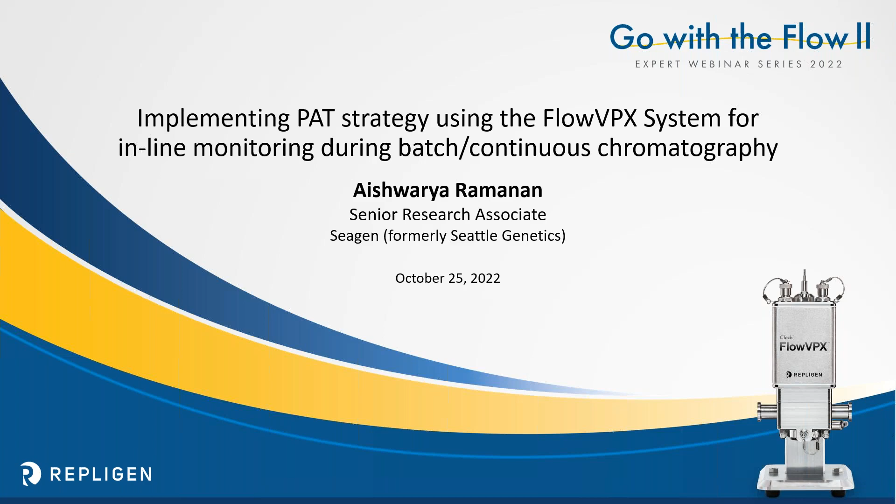The title of today's presentation is Implementing PAT Strategy Using the Flow VPX System for Inline Monitoring During Batch Continuous Chromatography. Aishwarya, thank you for joining us, and please take it away.

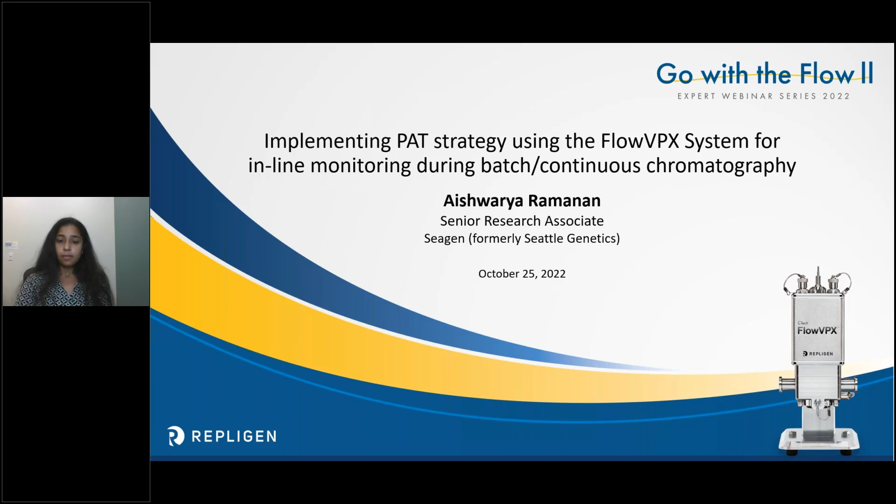So I will be starting by giving a quick introduction on the typical purification process flow and how and where PAT technology can come into play, followed by how VPX in particular helps with the process intensification efforts, be it in batch or continuous processing. And I'll be emphasizing more on real-time titer measurements, real-time binding capacity, especially with a dynamic load in between the process intermediates, and also talking a bit about the elution or eluate collection criteria determination, followed by an overview on integrating the Flow VPX with the Repligen KrosFlo KR2i system for automated TFF runs, and closing off with a summary and a takeaway from the overall presentation.

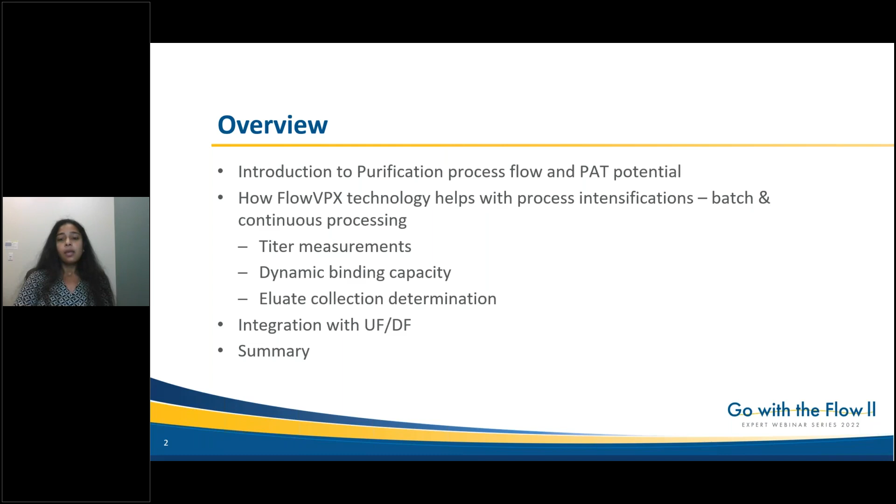So for starters, every industry already has a very well-established process with their batch chromatography. Why this craze to move towards continuous processing? And addressing the first point of smaller plant spaces, I think this is something we see even outside of the industry. As the demand is increasing, we are seeing smaller and smaller spaces available, and as such, that requires smaller setups. And with smaller setups, we are reducing waste, environmental impact, costs, and most importantly, the production time and the developmental timelines, because the scale-up requirement is reduced as you move on to a smaller setup.

And this helps meet the improved or increasing market demands. And finally, this is going to enable automation, which could help reduce human errors and ideally improve the regulatory compliance by automating the entire process.

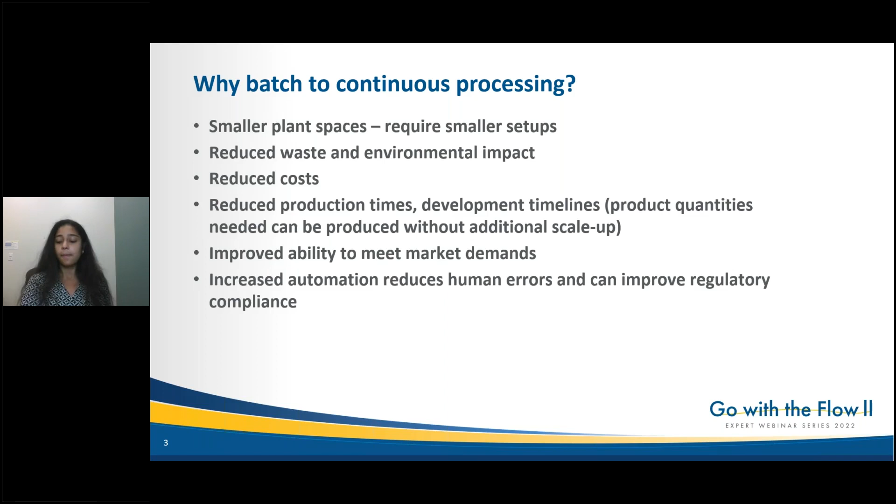So just to give you an idea of what a typical downstream process flow would look like: we have a production reactor from upstream, and from the production reactor the harvest is taken and processed over a depth filtration or clarification step. The clarified harvest then, typically for mAbs, goes through affinity chromatography, and typically it's a protein A resin.

After the protein A purification is done, the eluate from the protein A pool is processed through a low pH viral inactivation step, and it goes through an additional depth filtration followed by a polishing step. In some processes, it may be a 3-column step, and it may require a second polishing step.

After the polishing steps, it goes through nanofiltration and a TFF, or tangential flow filtration, step, where you're concentrating your protein or antibody to the desired concentration and diafiltering into the desired matrix. And finally, bulk filtration or sterile filtration and your final bulk intermediate.

The technologies we currently have that enable measurements, be it titer, in-process intermediates, protein concentration, or final bulk concentration, are the Cedex Bio HT analyzer. This is mostly used for titer measurements, as in harvest-related measurements, and it is a high throughput technology. It is mostly offline, and on average the time taken to get results is about 15 minutes, and sometimes it requires a dilution depending on your standard.

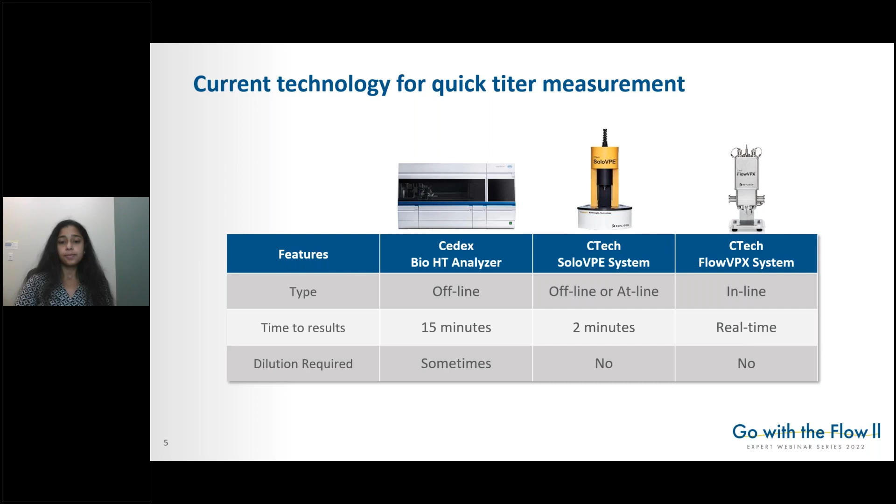So you all have an idea of what a typical purification process flow would look like. To give you an idea of where we can implement a PAT technology: for starters, we can implement it for real-time titer measurements right after the harvest clarification and before the protein A. This will reduce the time taken to submit samples onto the Bio HT and wait for titer results before loading. This can be immediate, and you can start loading your protein A right off of the harvest clarification.

In the next step, you can implement it to establish the binding capacity of the resin, and this can be implemented on the protein A step all the way to your other polishing steps as well. During your low pH viral inactivation step, it can be applied to determine the appropriate titration based on your protein concentration.

In the depth filtration part, you can use the VPX to refine your depth filter collection criteria. For the most part, we end up over-diluting the depth filtrate, or there is tailing. In such cases, I think the FlowVPX will come in very handy to determine a much narrower, more accurate collection criteria.

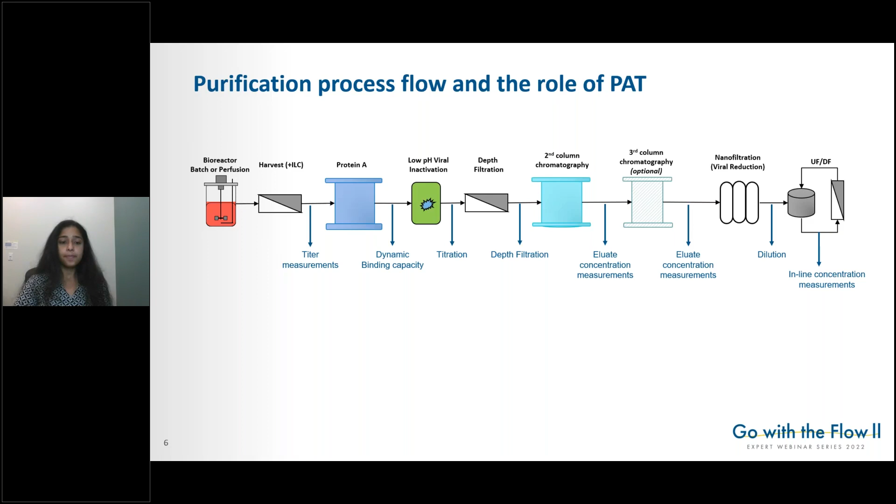This is going to be particularly handy if you're dealing with a product that has a density of over 1; then an inline concentration measurement is going to be more accurate. Applying the FlowVPX between the process steps is going to drastically reduce the hold times in production, and this could vary from industry to industry, but I think it is also going to allow increased automation between the process steps. As a result, this is going to help efficiently convert batch to continuous chromatography downstream.

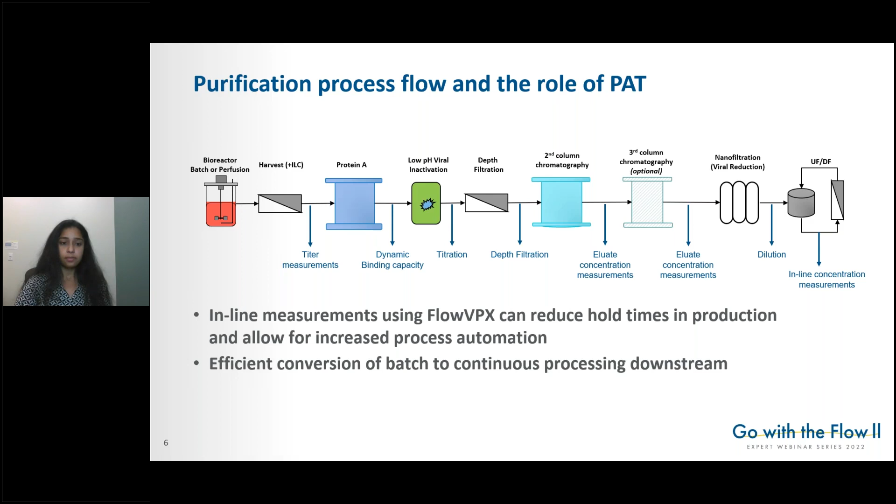So starting with the harvest step, I think one of the major rate limiting steps for a protein A or a capture step can be a low clarified harvest titer. And in this case, we have a technology out there that is called the inline concentrator, or an ILC, that can be applied to concentrate your harvest to your desired concentration.

And what I'm going to talk about today is how this can help intensify your capture process and reduce your cycling time with your protein A or a capture step, and how the VPX played a role in this. So we have the harvest fluid, and then we have the inline concentrator, and then we have the protein A. And what was done is there was a flow VPX unit that was incorporated before the inline concentrator, as in the ILC load, and another flow VPX that was incorporated in the ILC permeate side.

So to just give you a quick overview on how the ILC works, an inline concentrator is a series of stacked membranes that helps concentrate your product that goes in, and by adjusting the retention time through the stack of membranes, on a pressure basis, you can adjust your desired concentration factor that's coming out through your permeate line.

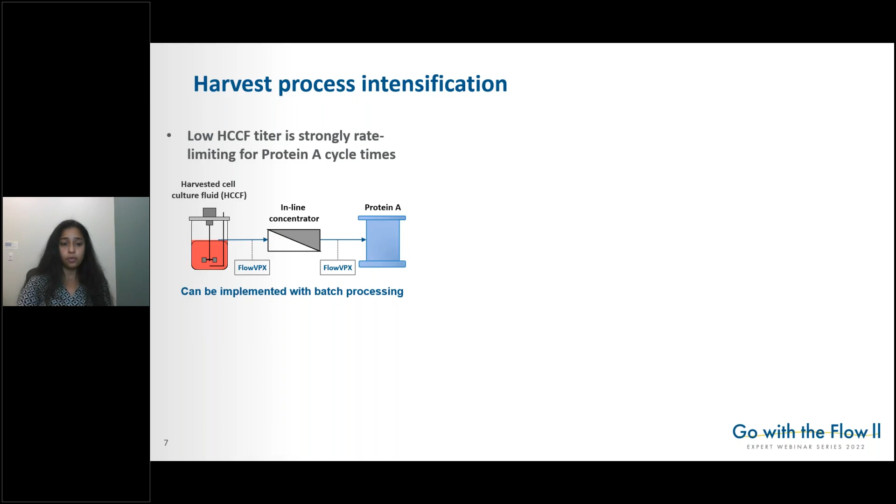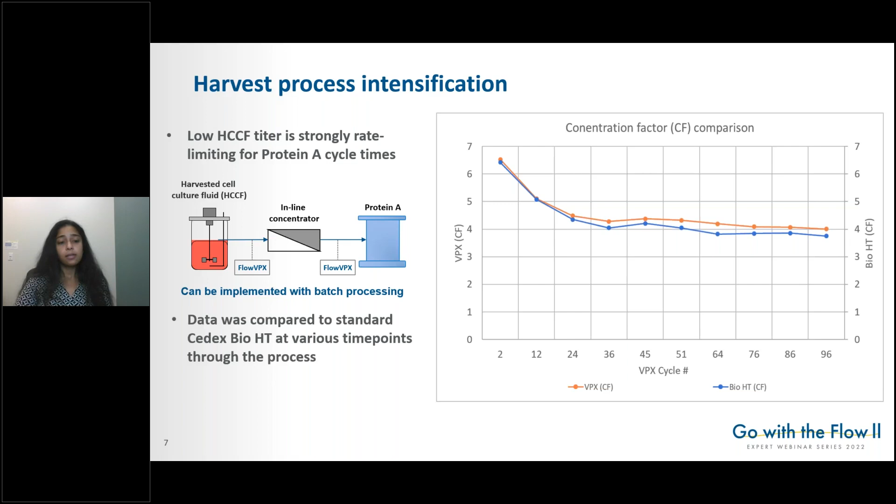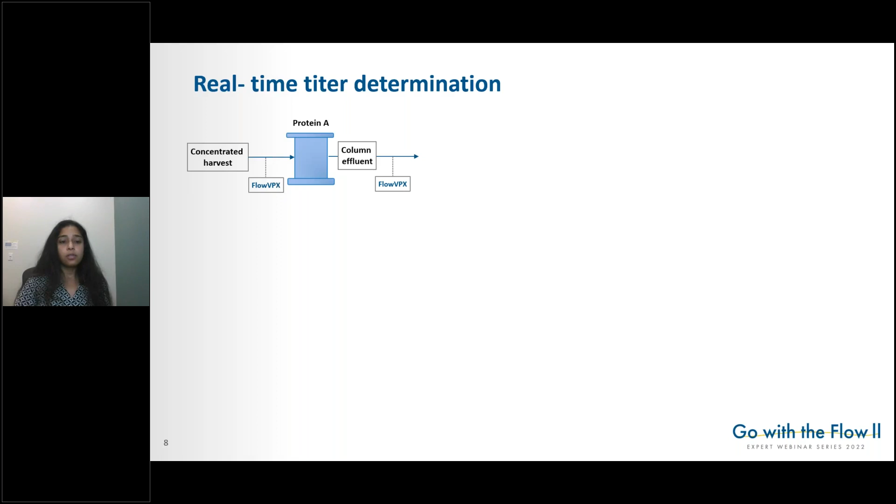So now that we have addressed harvest concentration measurements, how do we determine real-time titer measurements? And for this, the flow VPX from the ILC outlet or the ILC permeate remains online, and another flow VPX can be incorporated onto the protein A or your capture column effluent. So the difference between your column effluent and your harvest would ideally give you a titer. And you can see that the VPX pretty much well aligns with the BioHT.

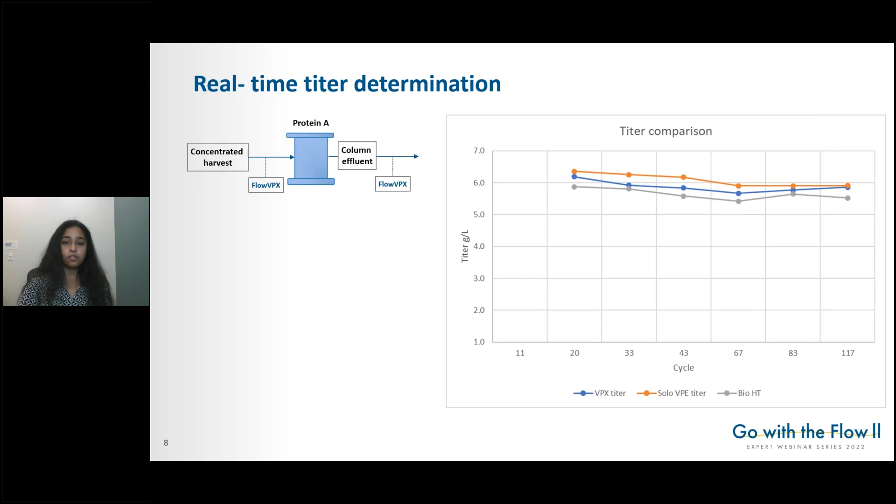And the solo VPE values were taken as well because we have studies that show that the solo VPE can help with real-time titer determination. And I wanted to see how the VPX and the solo VPE compare to each other. And I think the percentage difference is very much acceptable based on this data.

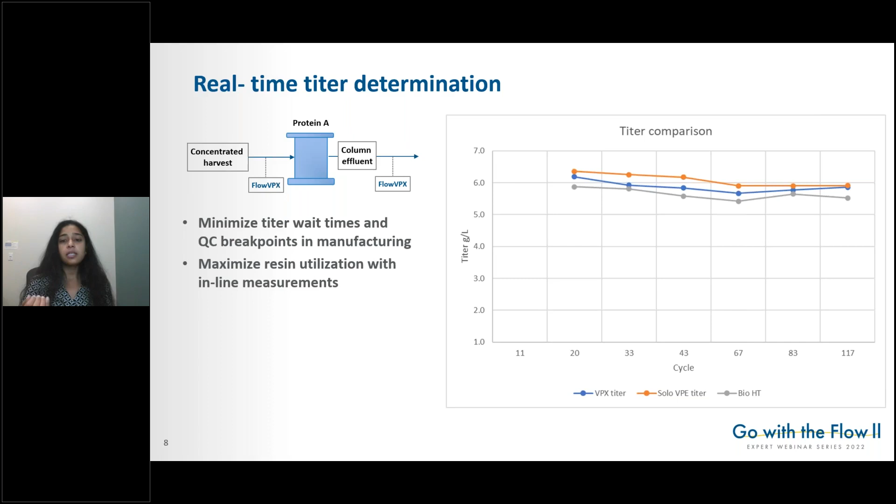So this is going to help drastically minimize the titer wait times, especially in a manufacturing suite, and help maximize the resin utilization. If you're talking about real-time titer determination, you can also do a real-time loading capacity determination, as in you can maximize the use of your resin instead of sticking to a predefined loading density or loading criteria.

And this can also be used as a secondary UV detector due to its variable path length ability. And this can come in handy if you're trying to move towards multi-column chromatography and you would like to use an existing system.

So for this, you place a VPX unit onto the column effluent, and the assumption is that at this step, you can use offline measurements as well, or you can keep the VPX in line with your previous intermediate, and you can use both the systems in place and get a difference between the effluent and the load, similar to what I was talking about with the harvest or the titer determination.

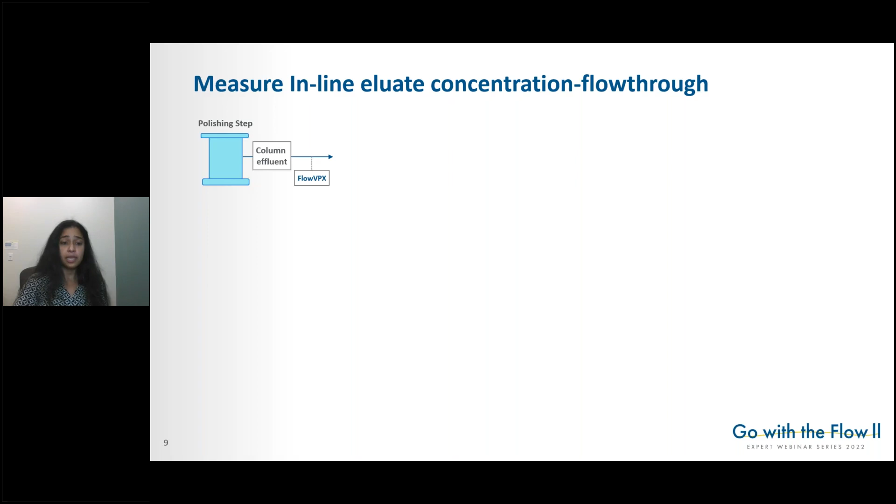And you can see you can get a real-time graph that can be plotted. And the graph very well aligns with how your typical UV chromatogram would look like. And almost all industries out there that are doing downstream processing use an ÄKTA. And they base their collection criteria off of the ÄKTA UV readings. And they typically determine a UV cutoff for the start and stop collection criteria.

And the one disadvantage that could happen at times is that you may end up over diluting your pool, which could lead to a longer loading step with the next step in process. So what the VPX can help is do a real-time cutoff based on concentration instead of relying solely on the UV cutoff off of the ÄKTA.

And this is going to help minimize dilution that you may see in situations where you see tailing, or in situations where you end up over diluting your product for various reasons. This is going to help enable continuous processing because this can ideally eliminate your hold tanks or intermediate tanks. And this is going to come in very handy when you have smaller space requirements.

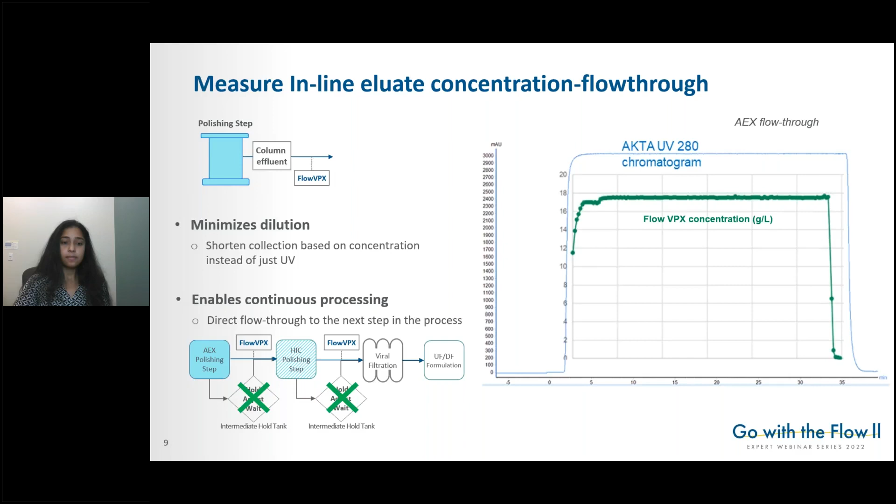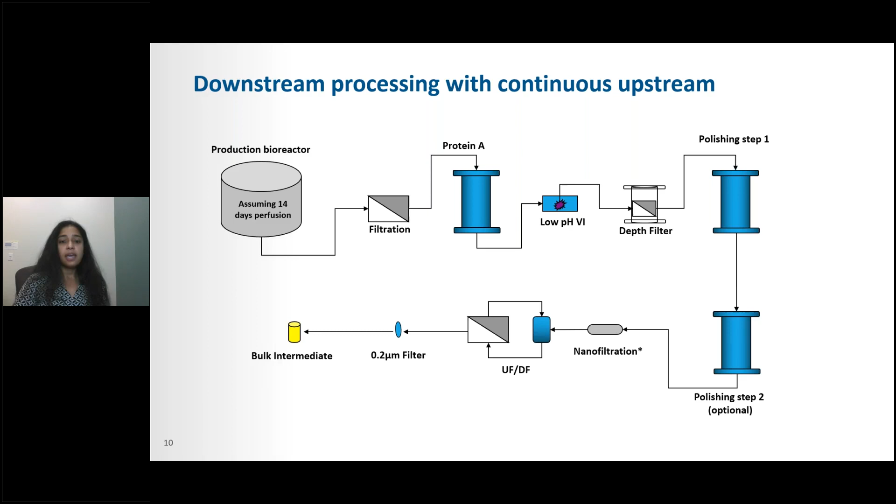So just to give you another overview or a quick recap on what the downstream process steps involve, and what if we were to move towards continuous upstream? Say continuous upstream in today's words means perfusion. So assuming a 14-day perfusion process, this is going to be a bottleneck for downstream processing, because you're talking about perfusion that's constantly perfusing your product of interest, and your downstream will have to be equipped enough to handle the increased expression out of the cell culture process.

And that's where your first step of the process takes the most hit, and you're looking at probably up to 14 cycles of depth filtration. And if your titers are lower, then you're talking about maybe 4 cycles of your capture step per day, and ideally up to 14 cycles of the rest of your process steps as well.

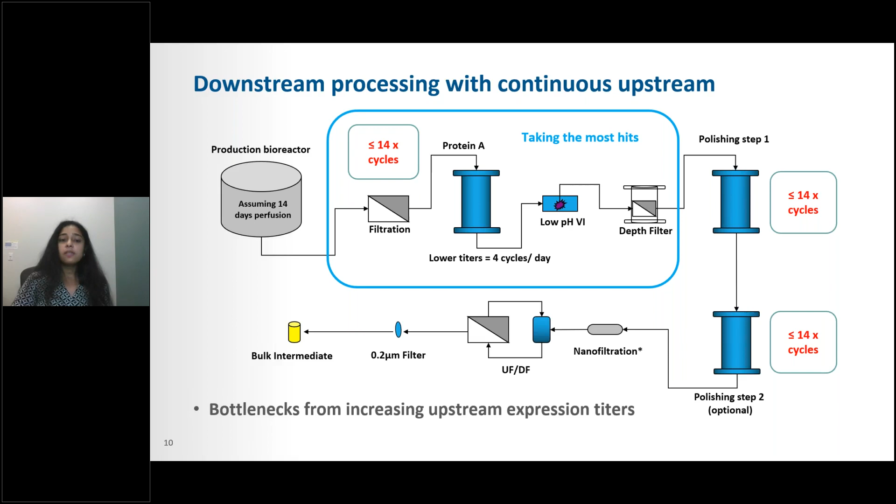So to tackle the increased expression out of the upstream process, the first step, if you're trying to stick to batch or semi-continuous mode, is to intensify your batch process to load until you see a certain percentage breakthrough, instead of using a predefined loading density. And basically, you're also helping maximize the utilization of your resin.

And given today's situation with the supply chain, especially after the pandemic, and also factoring in the inflation rates, I think most industries are looking forward to maximizing the utilization of their current resins. And this could be one of the spots to start.

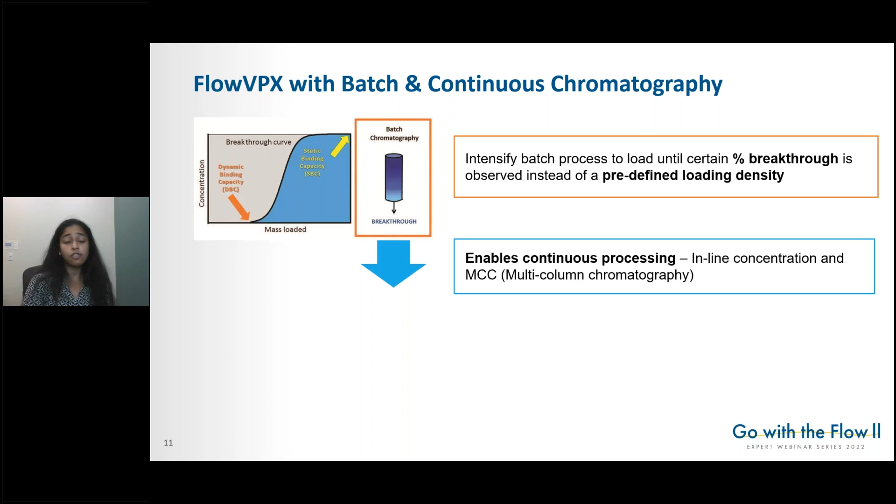This can enable continuous processing, as in you can apply it for inline concentration measurements, and ideally moving towards multi-column chromatography. And if you are moving towards multi-column chromatography, you can apply the flow VPX inline, and you can do a real-time optimization during the loads or during the entire chromatography step, in terms of the loading, the washes, the elution, the regeneration, etc. So this is again going to minimize the workload for analytics, and also reduce the wait times on our end for the results from the various groups.

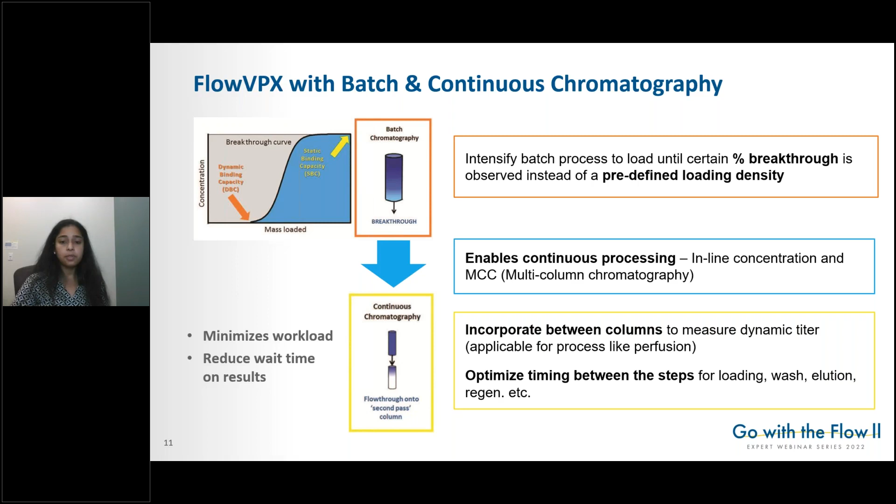And a quick idea on how this can be done is with batch process intensification: load until you see a certain breakthrough. The VPX can be applied on the column effluent side, and applying the very first principle of including a flow VPX onto the column load or the harvest side.

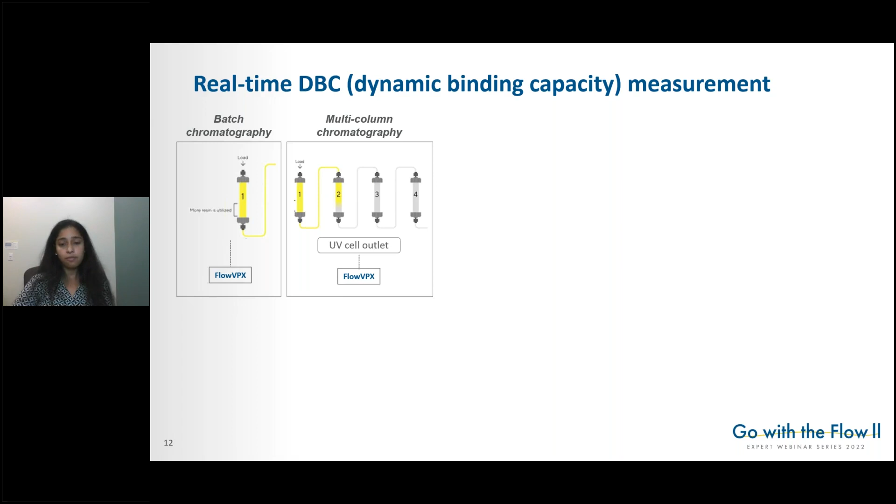With multi-column chromatography, I kept it open-ended, saying UV cell outlet, because this can be incorporated between 2 columns, or it can be incorporated into the appropriate flow cell outlet, depending on how many columns in series are using that outlet and where exactly you would like to place your VPX, and what exactly you are looking forward to in terms of the information coming out of the VPX or optimizing your run.

Just a quick idea on how the data could look like. So for starters, you're loading onto your first column in step, and this is your effluent, which is ideally a baseline, until you start seeing a breakthrough of your product of interest in the effluent. And once you see the breakthrough, you can skip towards your wash step, and you can optimize or hold your wash until you see all your protein or all the impurities getting washed off of your column prior to moving on to the next step in your process.

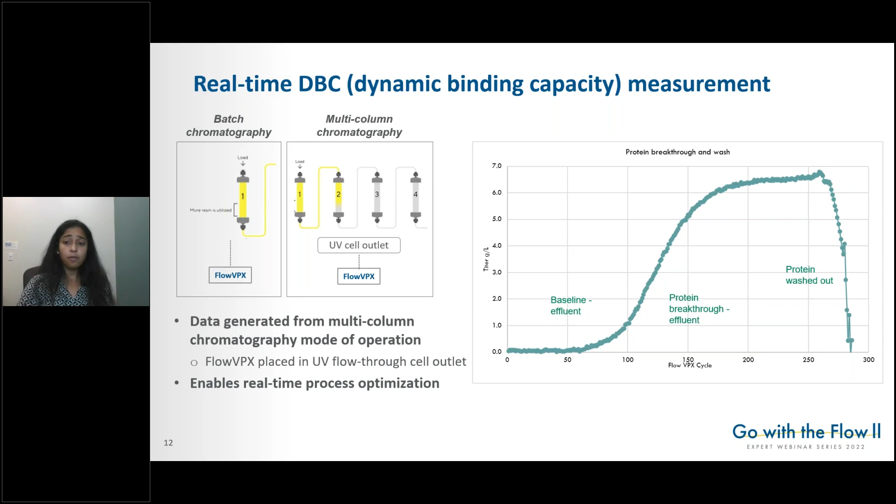This data was generated using a multi-column chromatography mode of operation, and this enables real-time process optimization. So talking about real-time concentration measurements, the one spot that I think Repligen has made it very easy is incorporating the cross-flow KR2I system along with the VPX. And I think pretty much most industries are aware of the cross-flow TFF system, and now that Repligen has brought out the VPX integration with the cross-flow system, you have a better accuracy for your stop criteria with your TFF system, because it can be made concentration based as opposed to just mass based.

And this is going to be very helpful if you're dealing with products that have a density greater than 1. And this helps avoid gravimetric dilutions and waiting for offline measurements, and then having to do a reconcentration or redilution. And it's going to help automate this step and better accuracy of your process.

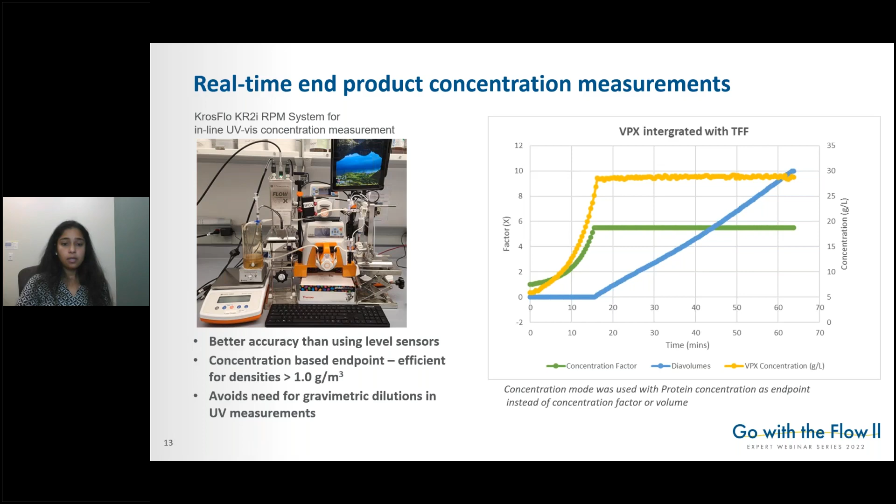So final takeaway or an overall summary is that FlowVPX as an inline PAT technology can be applied to our current batch processes, and it supports process intensification efforts, especially with real-time measurements or real-time dynamic binding capacity estimations. And it can also be used as an inline column UV detector or an add-on inline column UV detector to measure breakthrough, to optimize washes, or to measure or redefine your eluate collection criteria. And as a whole, this is going to help ease automation and enable us in taking another step towards continuous processing.